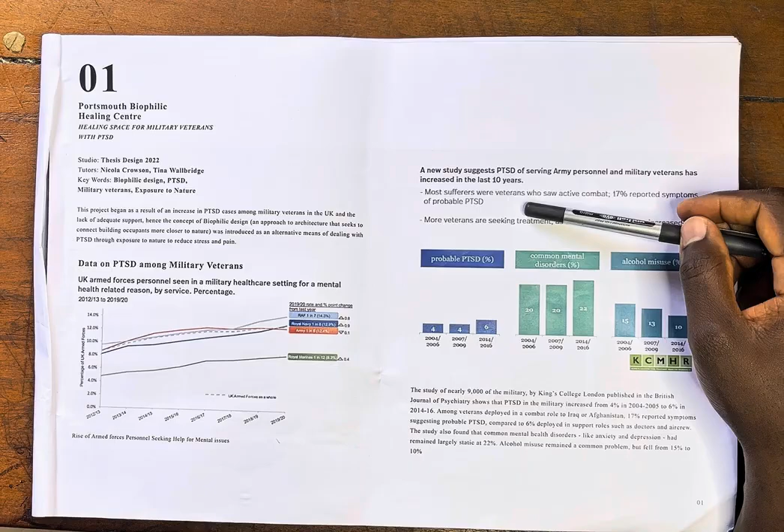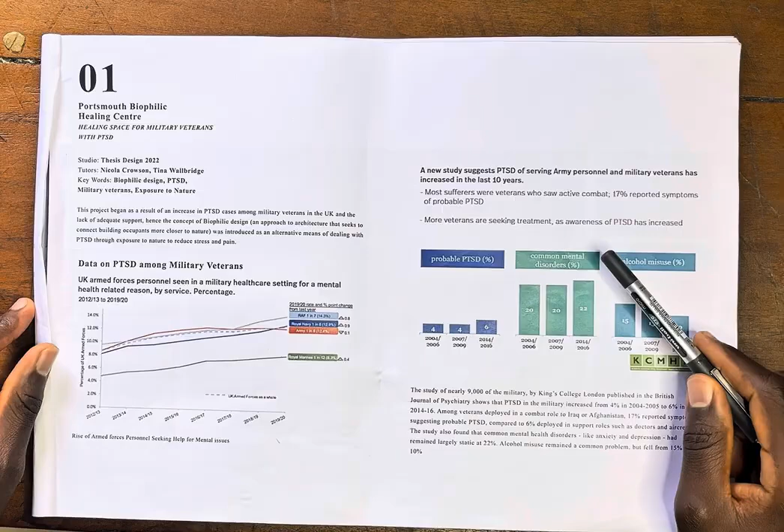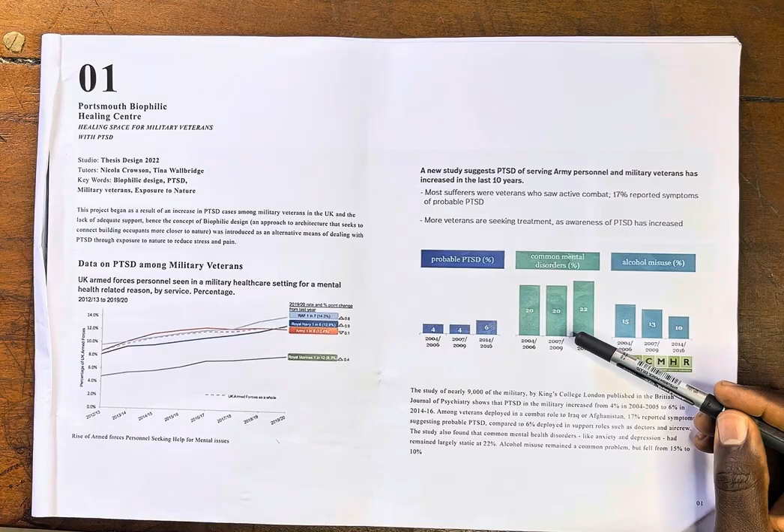This project is a healing space for military veterans with PTSD, meaning post-traumatic stress disorder. This project began as a result of an increase in PTSD cases among military veterans in the UK, and the concept of biophilic design, an approach to architecture that seeks to connect building occupants more closely to nature, was introduced to help deal with and reduce the stress and pain among veterans.

So over here we can see a rise in PTSD among military veterans visiting the healthcare center, among the Royal Marines, among the Army, among the Navy. We can see a rise from the year 2013 to 2020. There has been a persistent rise in military veterans visiting the healthcare setting.

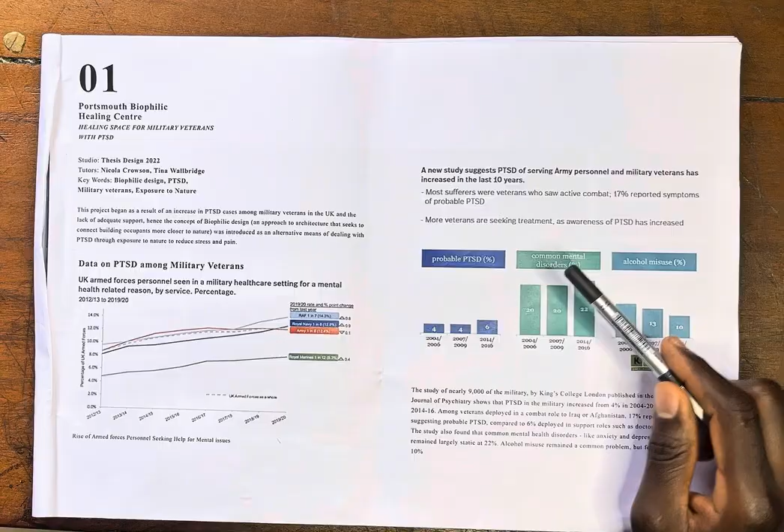Over here we can also see a rise in PTSD cases. In the year 2004 you see 4%, whereby we can see a jump here in 2014. So that was what prompted the design, to come up with a space that can cater for veterans with PTSD.

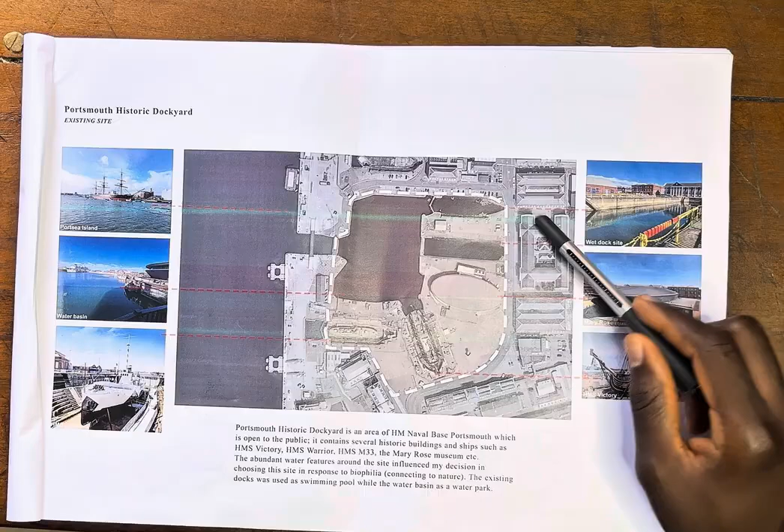So over here we have the existing site, the site we chose for the project. It's located in a naval base in Portsmouth Historic Dockyard, and we basically chose this site because of the many abundant water features it has.

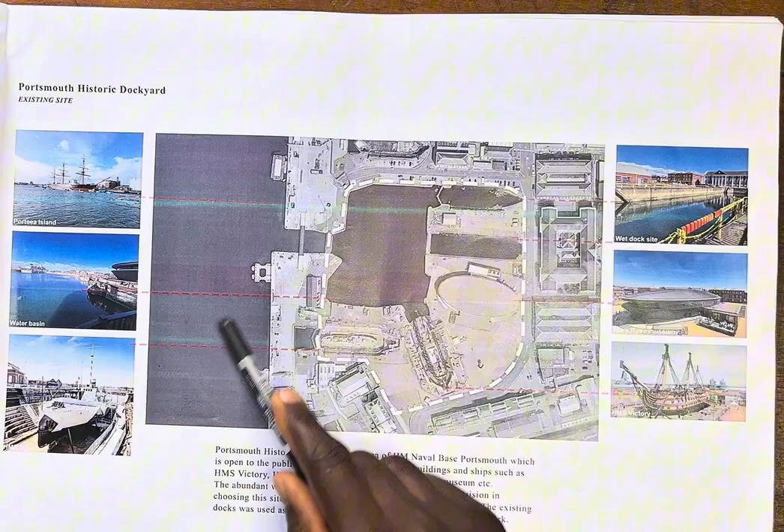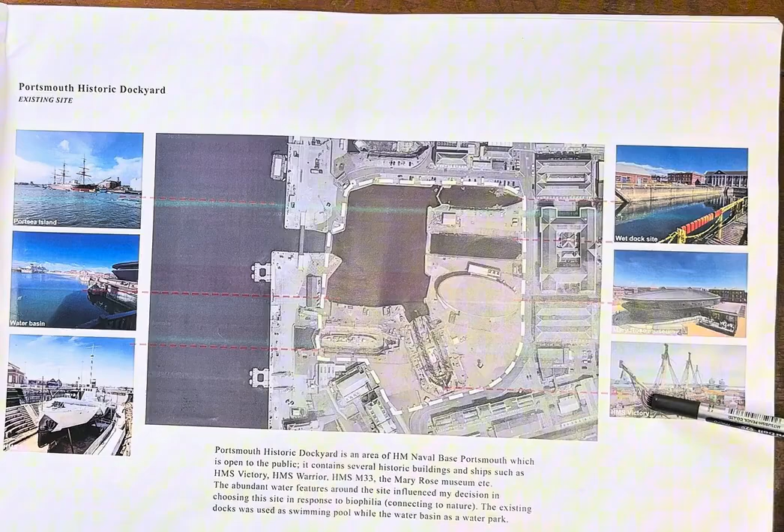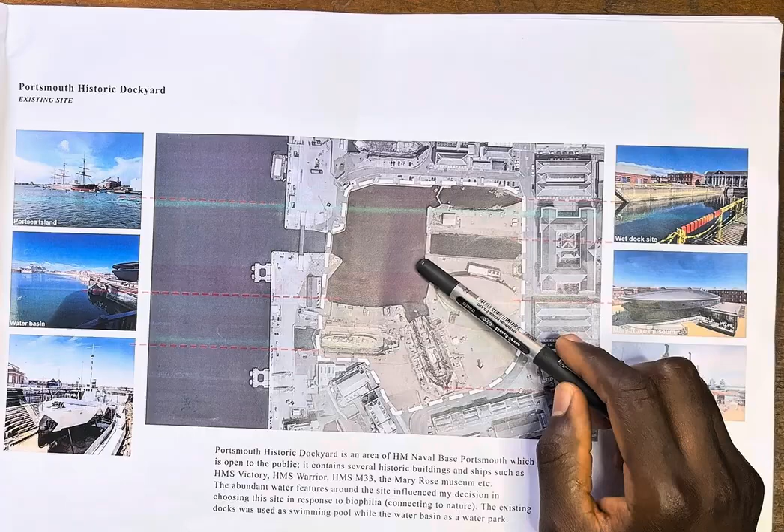So where we have a water basin, here we have an existing dock, which is shown clearly here. Here we have a water park, and then also on this side there are many various iconic ships like the HMS Victory, the Mary Rose Museum ship, the HMS M33 ship. So we chose this site basically because of the many abundant water features that can help cater for the military veterans suffering with PTSD.

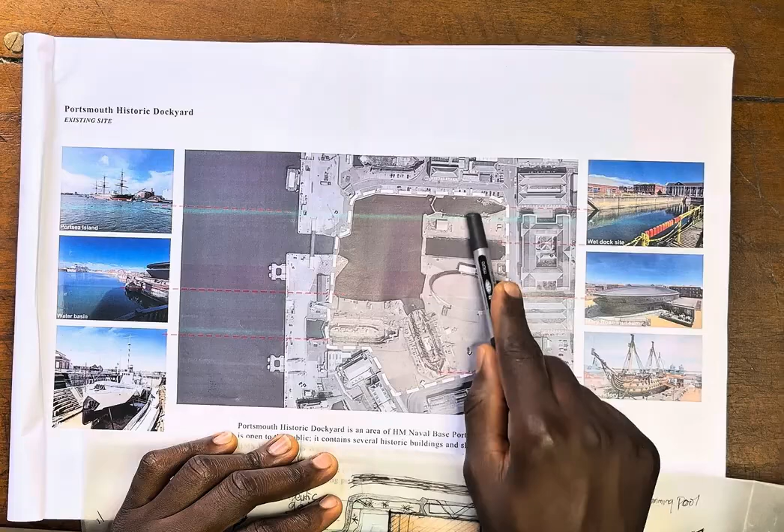So over here, the concept of the site we're looking at was to create a walkway, which would be an access road to the building. The idea was our building would sit overlooking this water, and we want to repurpose these existing docks as swimming pools. Then we're thinking of repurposing this water basin as a water park.

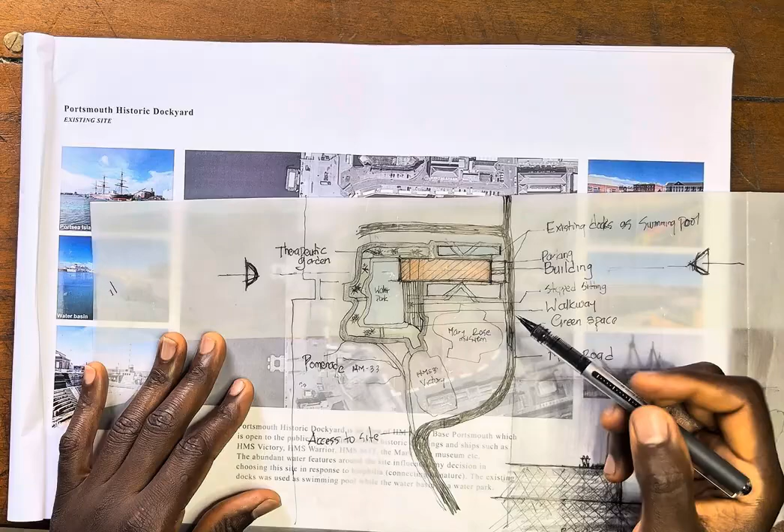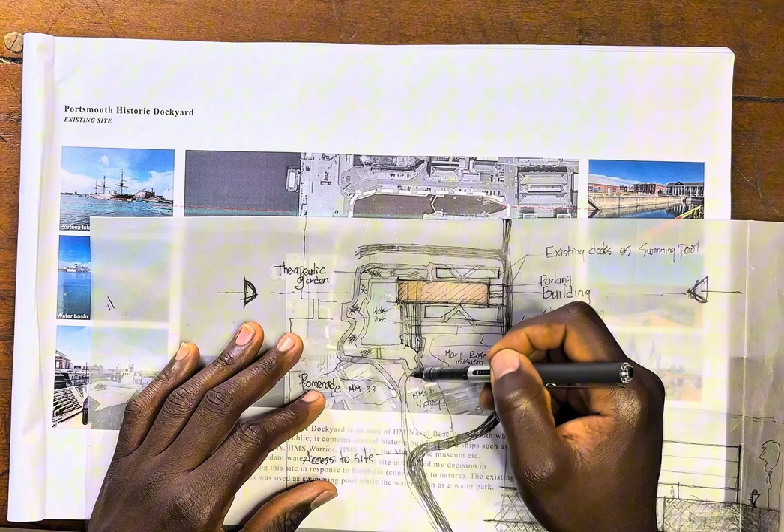So we came up with an initial sketch where we have a walkway to access the building. The plan was that the building is going to sit and overlook the water, which is this water park here. And then we're going to have a step seating to bring the occupants, the veterans, closer to the water - a series of steps that brings them closer to the water. Then you have this walkway, and these docks over here will be used as swimming pools.

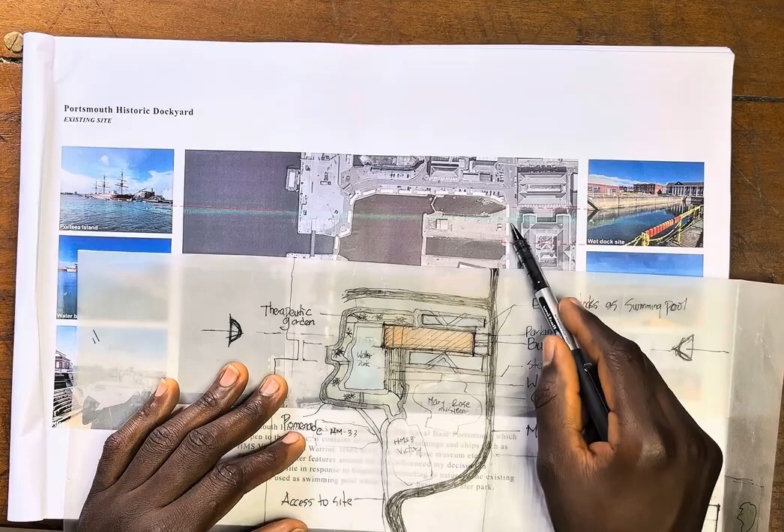Then behind here we have an existing park, a parking space for cars. We wanted to retain that space for parking also over here. So, basic sketch - we wanted to have a walkway around the site, around this water, where they can sit and have a look at the water to help them relax and ease their stress.

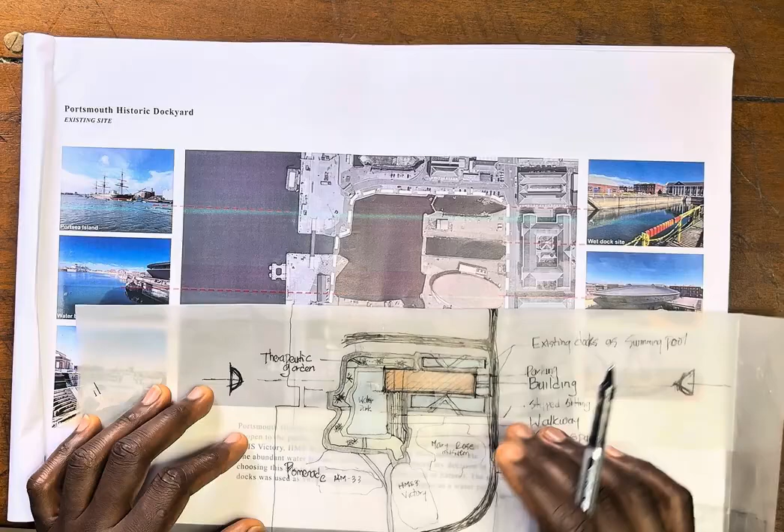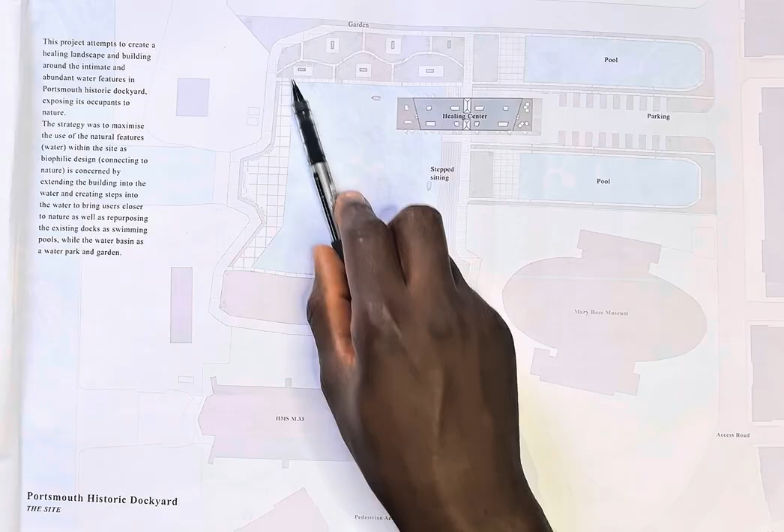Over here we have the site drawn to scale, and here we can see the existing dock, which has been repurposed into a swimming pool now, one on the left and one on the right. We can see the building which overlooks the water, and we have this nice step seating to bring the users closer to the water, and that walkway which we sketched before.

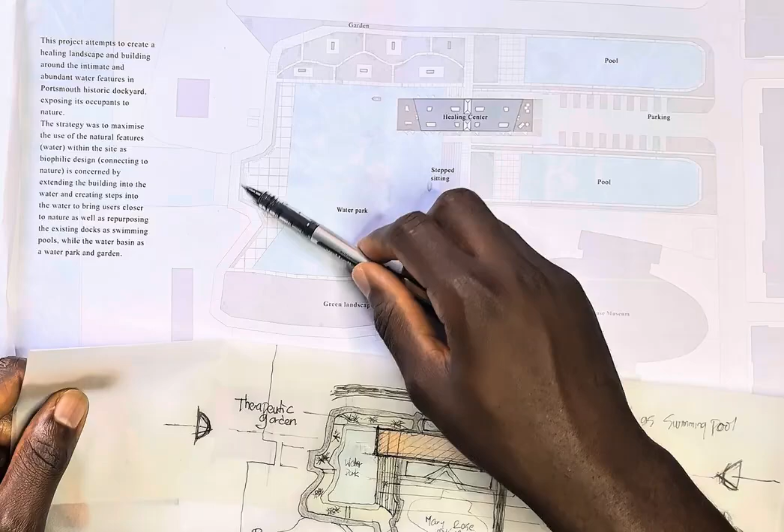We have this nice walkway, now drawn to scale, with a nice garden and walkway around a seating arrangement to view the water. And then we still have our existing ships - the Mary Rose Museum ship, the HMS Victory ship, and the HMS M33 ship - around the site.

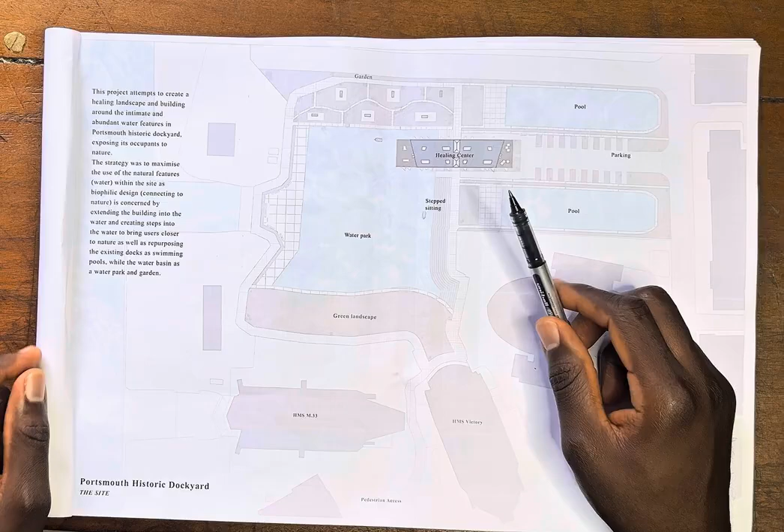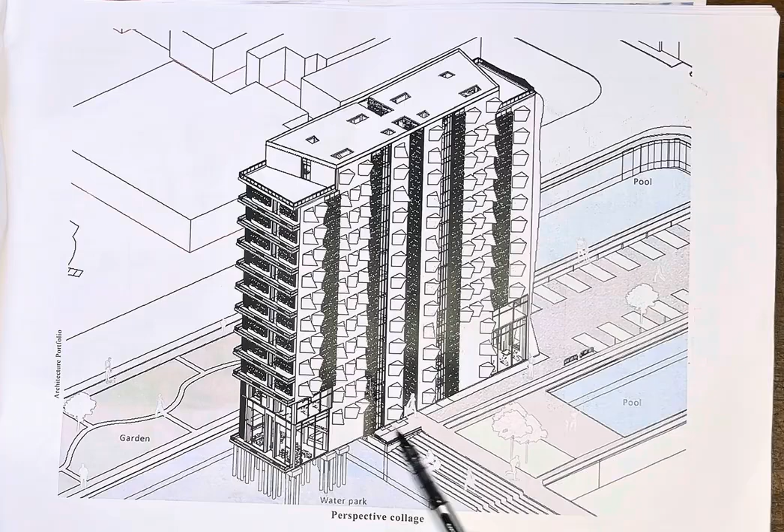The idea was really to create a healing landscape and building around these abundant water features. Here we can see the building in 3D form, with the existing docks repurposed to a pool, parking spaces, step seating which brings users closer to the water, a nice garden, and a walkway where they could view the garden and the building.

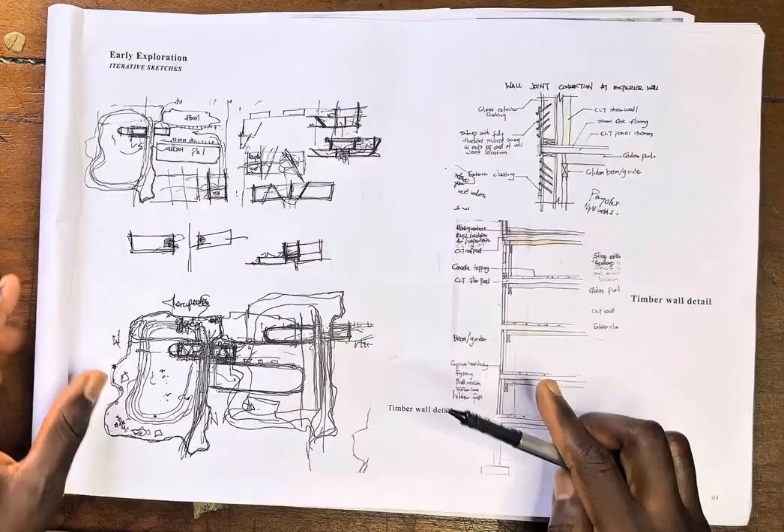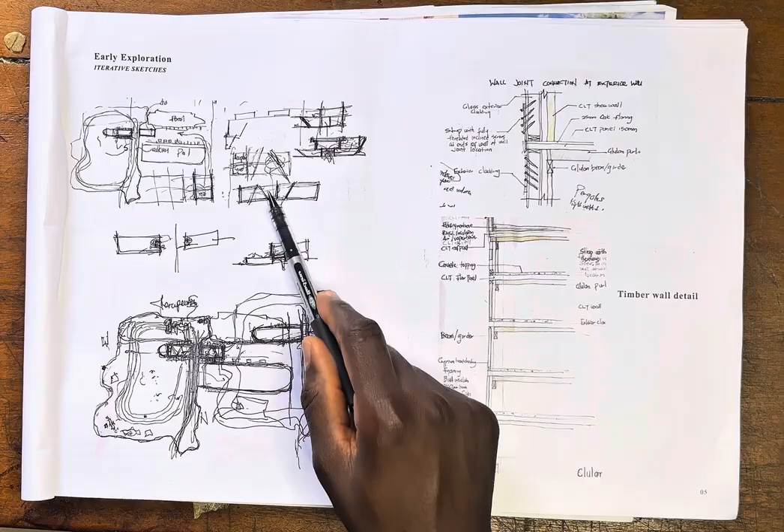Here were the early iterative sketches, bringing the concept to life. These are rough sketches showing how the building sits on the water, with the walkway and the pool. I came up with different shapes before I finally ended up with this nice rectangular shape.

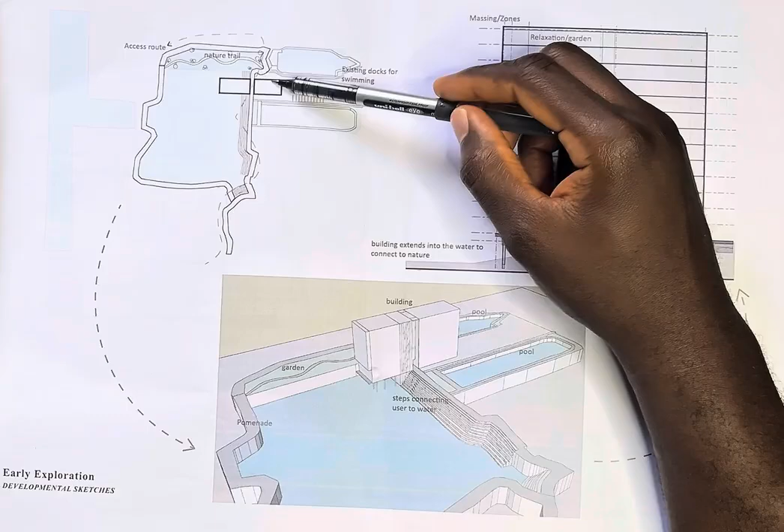We also have developmental sketches of the building. The idea was to have a walkway, with part of the building on water and part on ground, step seating overlooking the water, and existing docks to be used as a swimming pool. Here we can see it in 3D format.

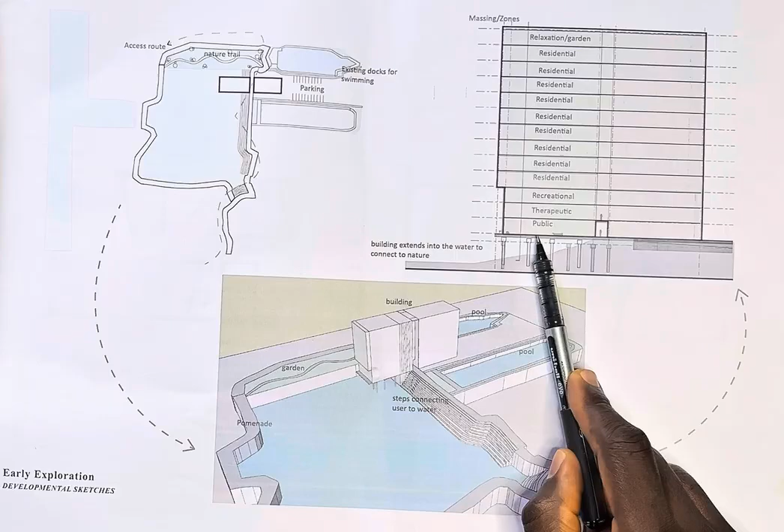We also wanted to mass the building, so the idea was that the public zone would be on the ground floor, which is the noisiest. Then we have residential floors on the other floors, along with a therapeutic zone and recreational zone, planning the building based on zones on different floors.

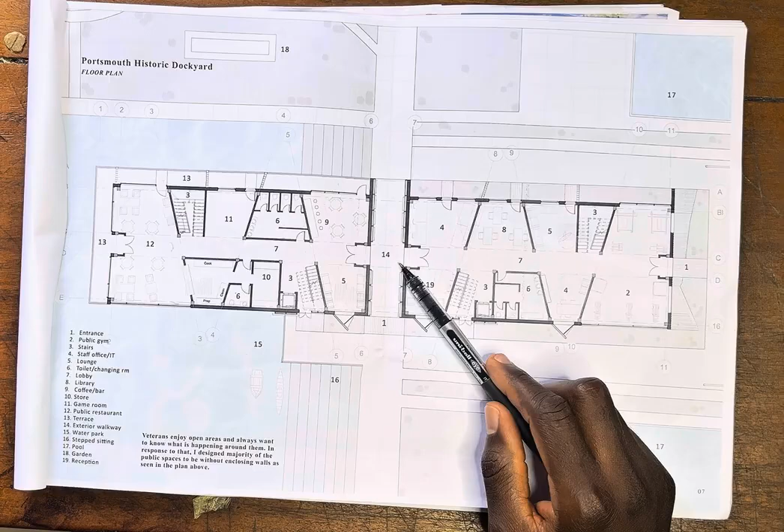Here is a typical floor plan of the ground floor. The idea was to make the spaces open, because veterans always want to know what is happening around them, so we wanted spaces that were not enclosed but open so they can see anything around them.

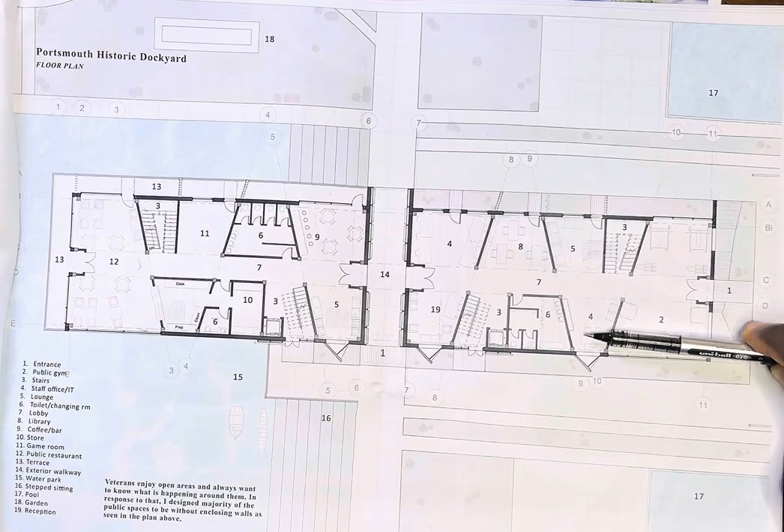Here's the gym, so we made it very open. Most of the spaces are open for veterans so they know what is happening around them, so they can see what is going on around them.

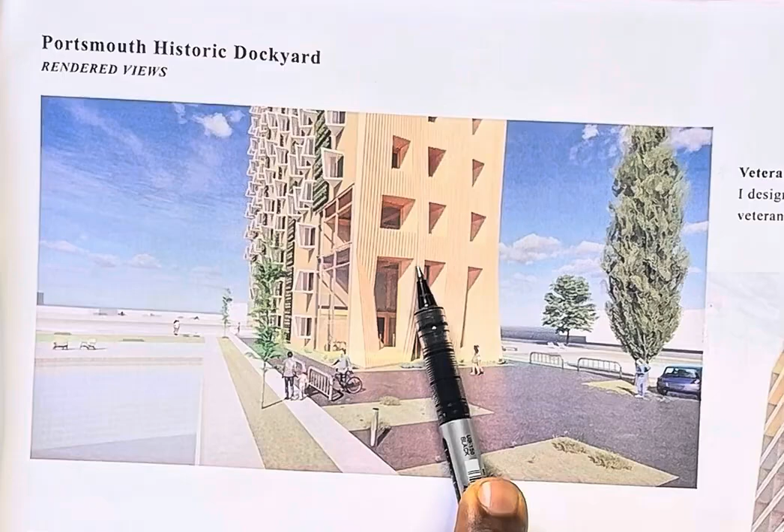These are some rendered views. Veterans really love curved spaces, so we thought of making the building facade curved to attract veterans to the building.

For the pools, we repurposed the existing docks as a pool. Previous research has shown that surfing and swimming can ease the stress of people with PTSD, so we created this really nice swimming pool for them to have a nice swim.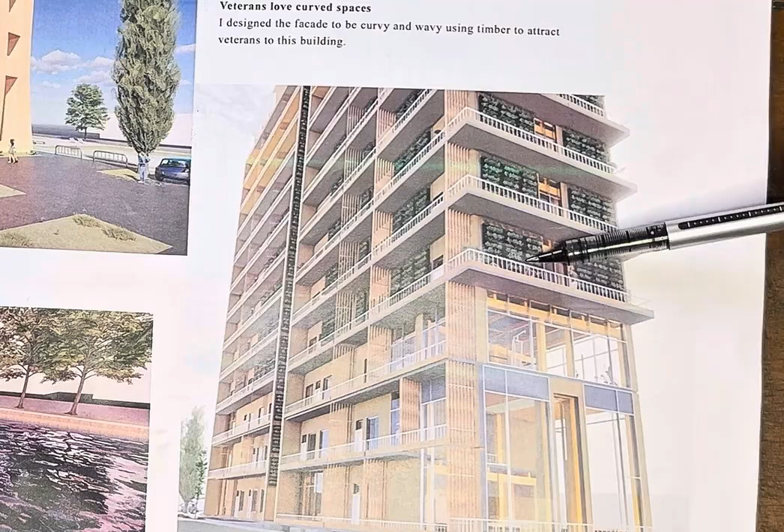We also created green spaces, because research has shown that green spaces help them feel better. So we created green spaces, with green wall spaces attached to the walls.

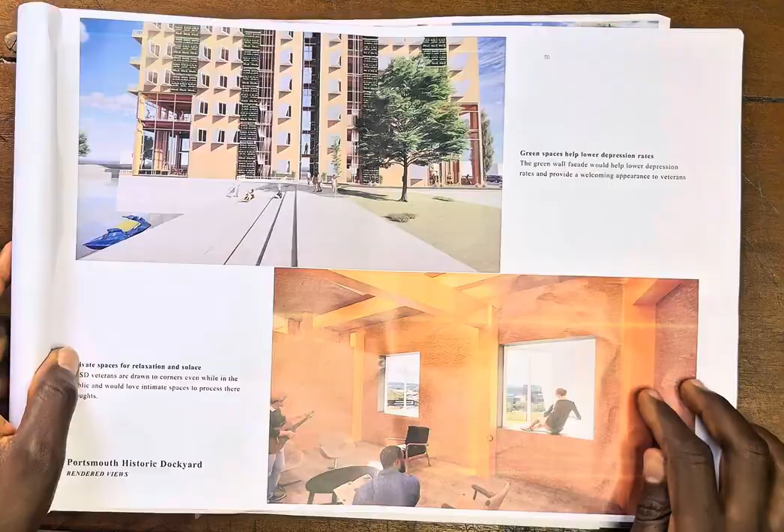So we have more rendered views over here. We have this nice step seating, which we can see here, bringing them very close to the water.

And then we have the green wall facade, which research has shown helps to lower depression rates. That's why we created these green spaces on the walls.

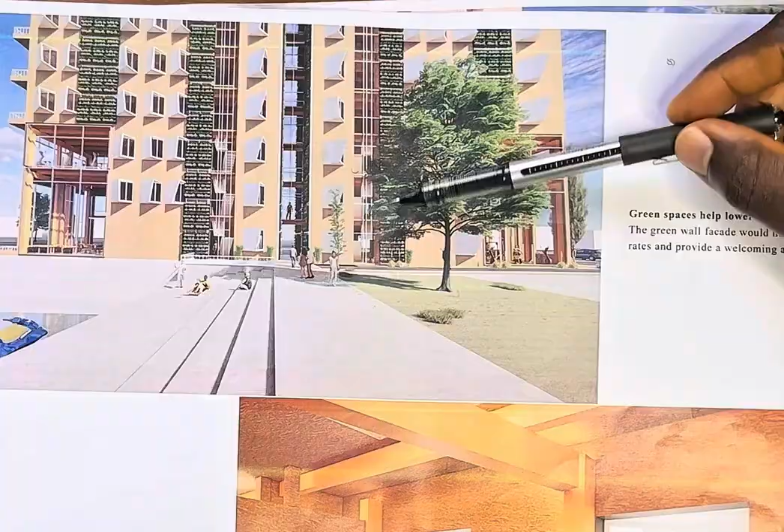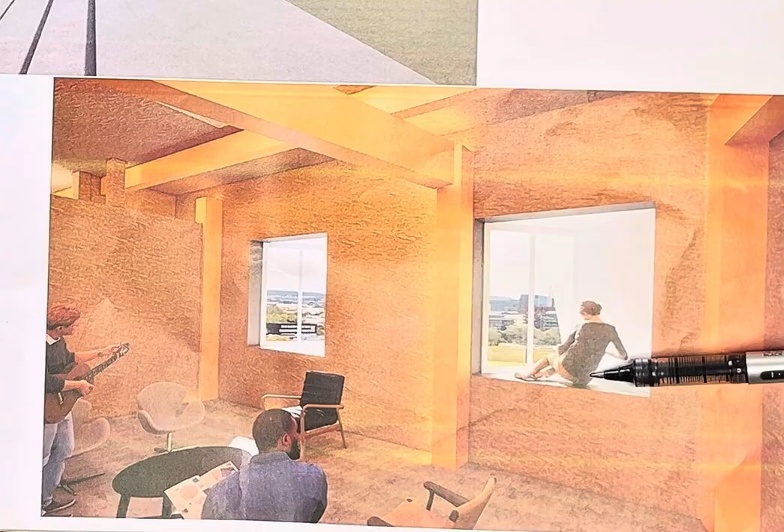Previous research also showed that veterans like solace, private spaces and private corners to reflect. So we made the windows bigger to give them a space to relax and also to read and study, which helps them feel better, because they are really drawn to corners. We created these nice big window spaces for corners, giving veterans a place of solace to reflect.